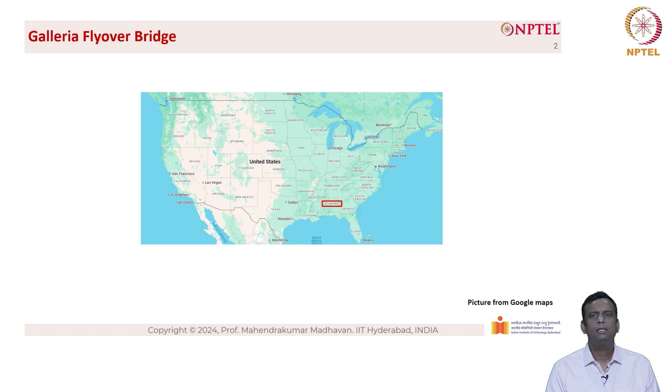This is the Galleria Flyover Bridge project, and what you see is basically the map of the United States, and on the rightmost side in the south there is a state called Alabama. Galleria is a place very close to the city of Hoover and Birmingham, and we are basically going to talk about a flyover bridge that connects the Galleria Mall with the Hoover city. You can see the highway I-459.

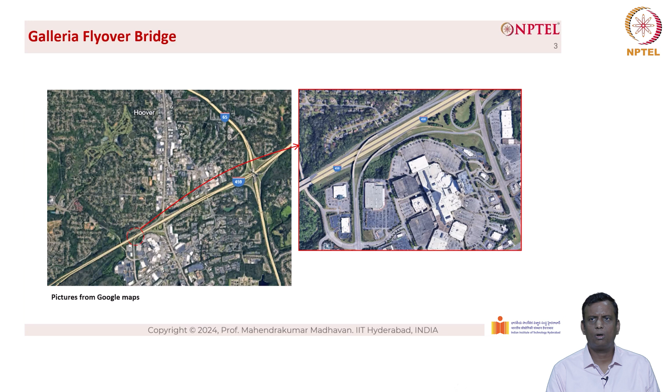A closer look at I-459 shows a bridge connecting the Galleria Mall from I-459. What you see on the right hand side is basically a huge mall. I've been to that mall, it's a very nice mall to spend time there. The project is called I-459 Galleria Flyover, Hoover, Alabama. Hoover is basically the city's name, a suburb of the greater city of Birmingham.

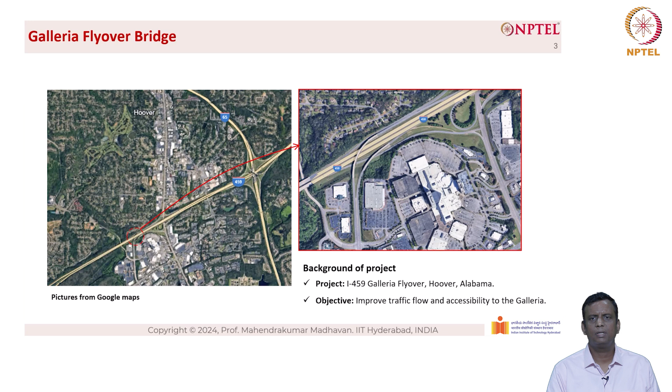The first one is the design and planning. The flyover structure is an elevated bridge with horizontally curved I-girders. When I say horizontally curved girders, don't get confused with its cousin, the arches. The arches are vertically curved. Here we are talking about a bridge. When you look at the plan from the top, it is horizontally curved, and hence it's called horizontally curved I-girders.

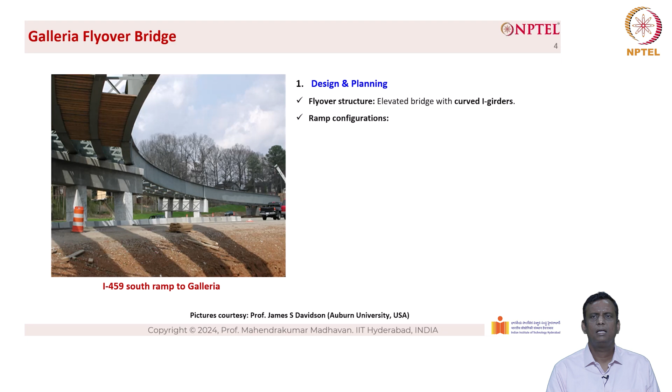The ramp configurations are: it's a two-lane exit from I-459 south to the Galleria Mall and a two-lane entrance from the Galleria to I-459 north.

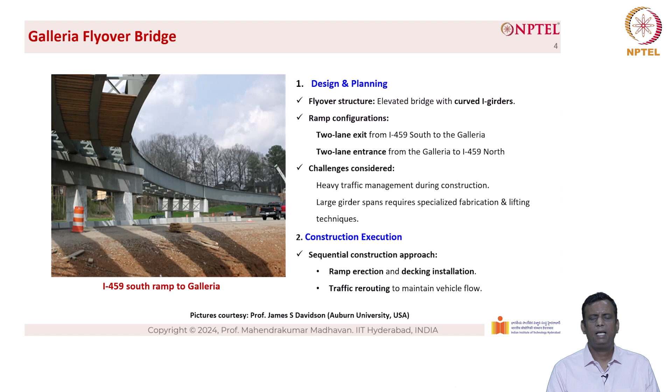The challenges considered are heavy traffic management during construction, and large girder spans requiring specialized fabrication and lifting techniques, especially for horizontally curved girders. For construction execution, a sequential construction approach was followed, first by ramp erection and followed by decking installation. The next important thing is traffic rerouting to maintain vehicle flow.

So the challenges in fabrication and construction: there are several fabrication techniques available for horizontally curved girders, especially for the flanges. The special methods are cut curving, heat curving, and cold bending, which introduce stresses.

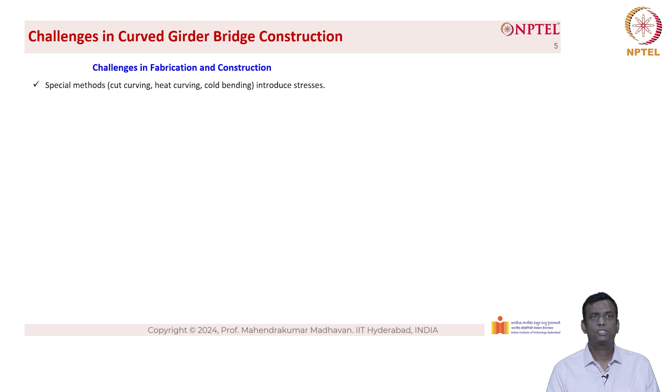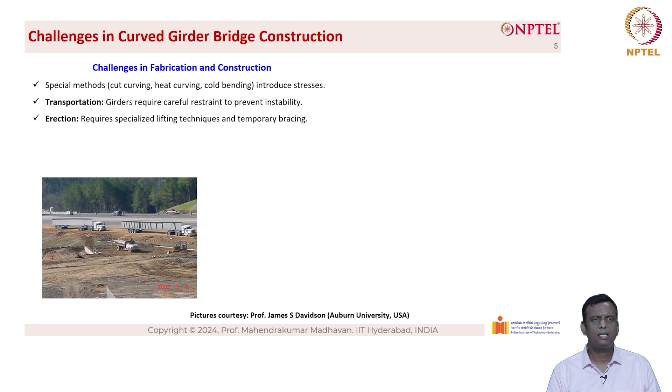The erection requires specialized lifting techniques and temporary bracing, and you can see the next picture that shows how the girders are being lifted through cranes.

Deck hardening, when you pour concrete, additional support is required to prevent distortion because, as you know, concrete is a liability during the deck pour and becomes an asset only after 28 days or once it has been completely cured. So we need to prevent any distortion that could take place due to the heavy dead weight of the wet concrete during construction. This requires additional support.

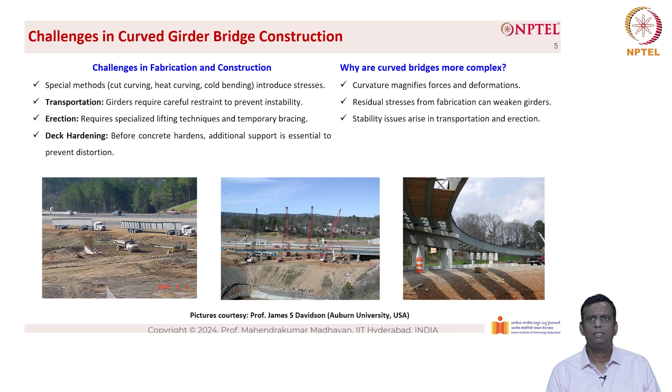The first and fundamental question we should understand is why curved bridges are more complex. Curvature basically magnifies forces and deformation, so it introduces torsion in addition to bending. The picture shows the horizontally curved nature of the bridges. Also, residual stresses from fabrication can weaken girders. Stability issues arise in transportation and erection, more so for curved girders than for straight girders.

The first fabrication method is the cut curving method. Here the flanges are flame cut from steel plates to the required curvature. The pros are it achieves any radius of curvature. The cons are that it is labor intensive and material waste due to scrap is very high when you do the cut curving process. Basically, the portions away from the curvature are ignored.

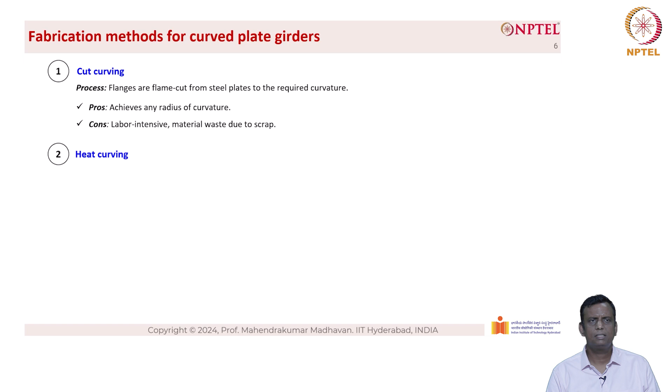The next one is the heat curving method. Here you basically fabricate an I-section which is a straight I-girder, and then you heat and cool the steel flanges at several locations using controlled bending. The methods are continuous heating, strip heating, or V-type heating. The pros are it is most economical with little material waste. The cons are it requires precise temperature control and specialized equipment. Basically, it is an art in heat curving, and the most common type of producing a horizontally curved girder is by V-type heating.

Several state Departments of Transportation in the US have expertise in V-type heating. They put the I-sections in a flat portion where the flanges are vertical and the webs are horizontal, supported at several locations since it's a large girder. In between the supports, V-type heating is applied, heating at several strategic locations to achieve the desired curvature. Once achieved, heating is stopped.

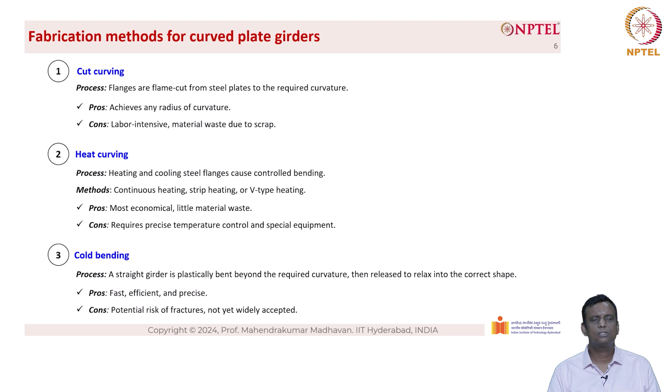The third method is cold bending. Here, a straight girder is plastically bent beyond the required curvature and then released to relax into the correct shape, known as the rebound effect or elastic relaxation. The pros are that it is fast, efficient and precise. The cons are the potential risk of fractures, and it is not yet widely accepted, because when bending the girder without heat, there is a possibility it could crack, which is undesirable.

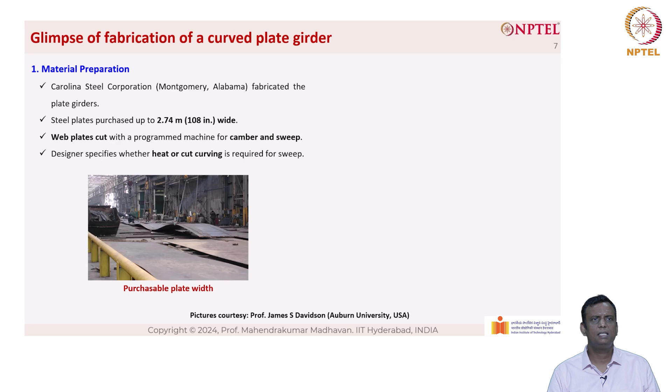Let's look at a glimpse of the fabrication of a curved plate girder. The first stage is material preparation. In this case study, the fabricator is located in Montgomery, Alabama, the capital of the state, and the organization is Carolina Steel Corporation, who fabricated the plate girders. The steel plates purchased were 2.74 meters, or 108 inches wide, and the web plates were cut with a programmed machine for camber and sweep. Camber means bending in the major axis, and sweep means bending in the minor axis. The designer specifies whether heat curving or cut curving is required for the sweep.

The web lies flat and the flanges are positioned vertically for tack welding. A specialist machine aligns and applies pressure to hold the flanges in place. The flanges are first tack welded and then the girder is flipped for full welding, which is submerged arc welding, typically used in India as well, in pre-engineered building factories these days.

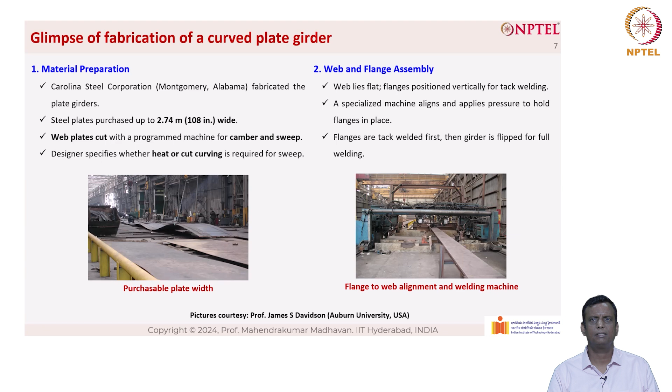A continuous fillet weld joins the flanges to the web, and flipping the girder ensures complete weld penetration. The weld sequence is carried out to control and minimize distortion, so welding isn't done continuously. Instead, strip welding is used, where certain portions are welded and gaps are left before welding other portions. This reduces the heat input, which in turn minimizes distortion. What you see on the rightmost side is the submerged arc welding.

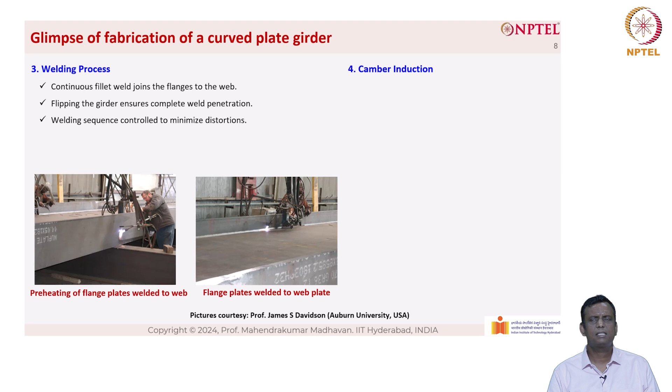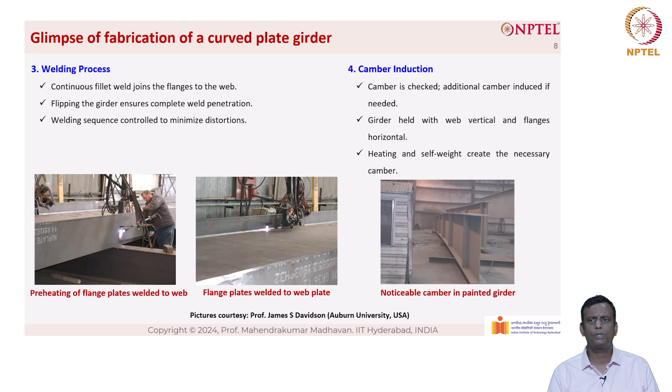Stage 4 is camber induction. Camber is checked and additional camber is induced if needed. The girder is held with the web vertical and flanges horizontal. Heating combined with self-weight creates the necessary camber, as you can see from the noticeable camber in the painted girder shown on the right.

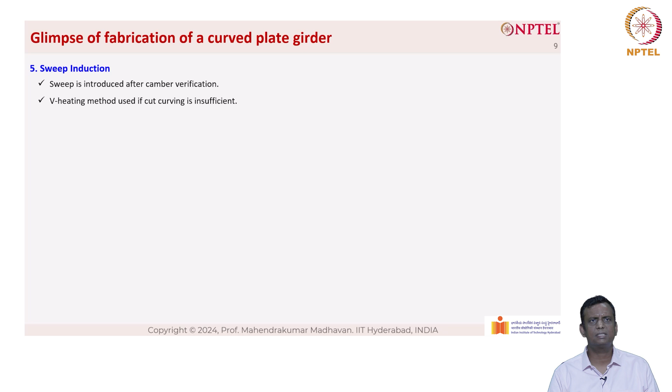The next step is sweep induction, which is bending in the minor axis. Sweep is introduced after camber verification. The V-heating method is used if cut curving is insufficient. So even if the fabrication method is cut curving, V-heating may still be used to introduce sweep. In this method, heat is applied in a V-shaped pattern along the flange of the girder, with the apex of the V pointing towards the desired direction of movement.

As described previously, heat is provided at the flanges, and the apex of the V points toward the desired direction of movement. If you want it to sag, you apply heat at the location closer to the ground. This causes plastic deformation beyond yield, and due to self-weight and loss in material capacity, it tends to sag, which can be treated as curvature. The self-weight combined with controlled torching heat creates the required sweep.

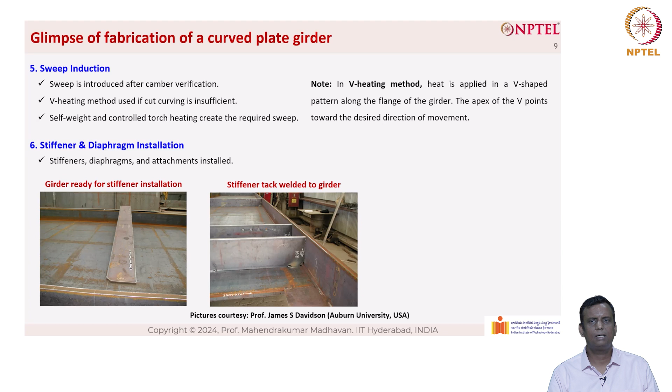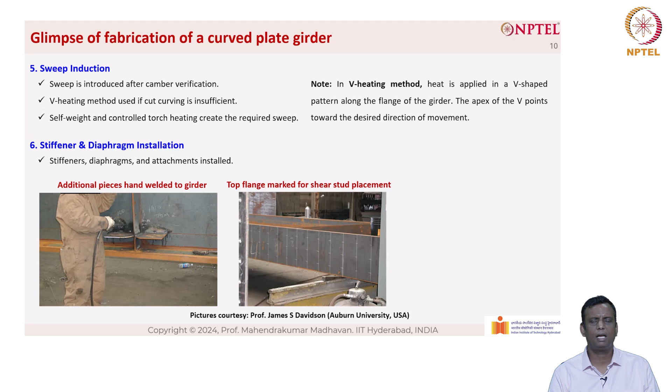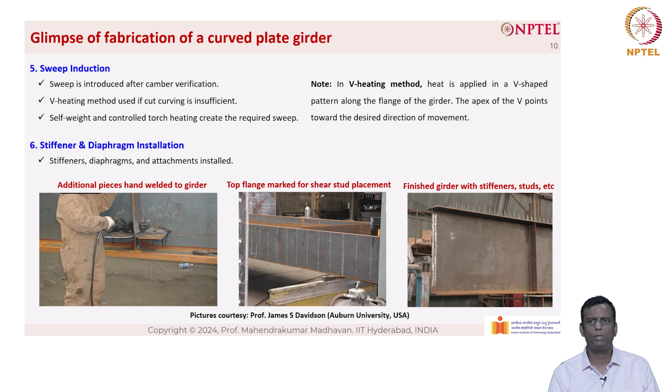Once that is done, you can see the finished girder with the stiffeners and studs, etc. The studs are required basically for composite action, so it will prevent slip between the concrete and the steel plate, ensuring more composite action. The more the composite action, the more your ability to carry load.

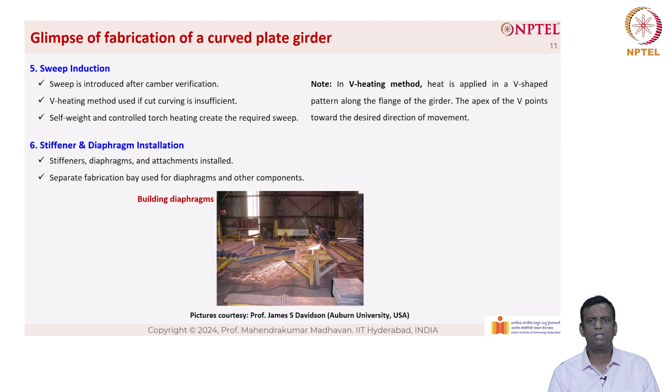Then after that, there is a separate fabrication bay used for diaphragms and other components. This picture shows the building of the diaphragms. Diaphragms also basically mean cross frames.

The next is surface preparation and painting. The plate girders are blast cleaned before painting, because if you don't clean it properly before painting, the paint will not stick with it and it will come out very quickly.

The cleaning can be done using a blast cleaning machine or manual blasting hose, typically using steel balls. The steel balls are kept inside a machine and hit at the plate girders, and all the dirt belonging to that will come outside, and it is clean.

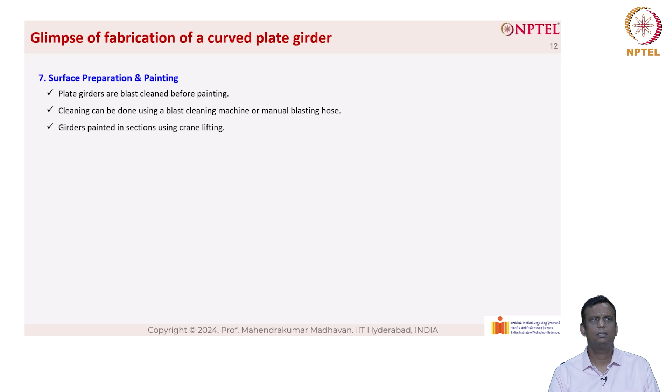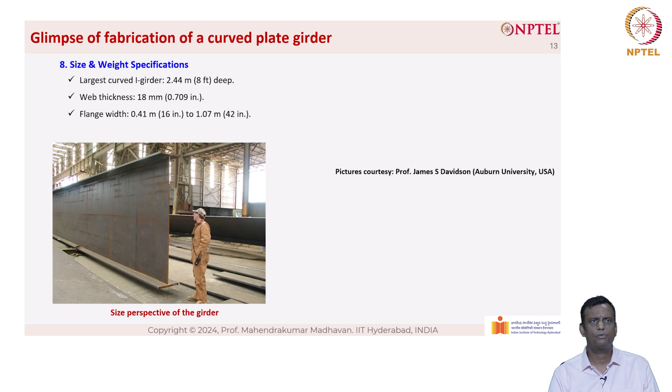The web thickness is typically 18 mm. The flange width varies from 16 inches to 42 inches, or basically 410 mm to 1070 mm, depending on the analysis part where you need more bending moment and shear force. The flange thickness is basically 1 inch to 3.75 inches, where 1 inch is 25 mm, so that's 25 mm to 95 mm.

The longest girder between the splices in this project is 106 feet, and the maximum weight of the girder is 68.3 metric tons.

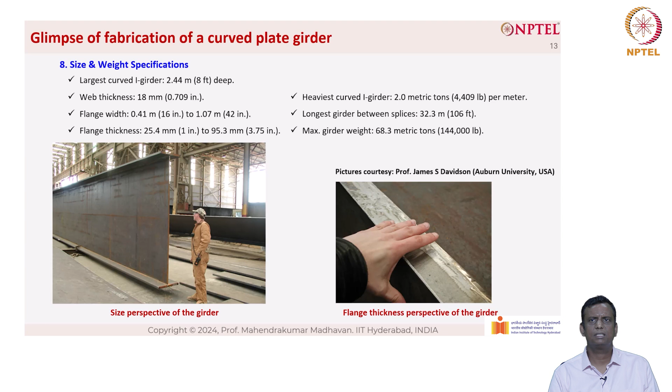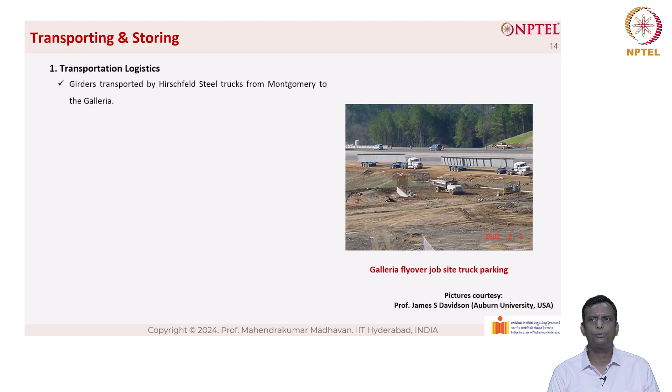Next comes transportation and storing, starting with transportation logistics. You can see that trucks are lined up and parked near the construction site in the picture on the right hand side. The girders are transported by Hirschfeld steel trucks from Montgomery to the Galleria, and coordination between the erector and the fabricator ensured timely delivery, because there needs to be good coordination between the erector and the fabricator.

The driving list is created based on the erection sequence, so you need to know which girders are going to be erected first, second, third, and so on. It becomes very essential to sequence the position of the girders, and accordingly the transportation should be carried out, so that the girders required immediately will be transported to the construction site.

The trucking methods are of two types. One is for a short girder, which is transported on a flat trailer, so when it is very short, a flat trailer is used. The next one is called a dolly, where long girders are transported using a dolly for better maneuverability.

If the girder is very long, there should be some ease of movement with the truck, both at the front and back portions where the girders are being transported. A dolly is a special mechanism where the truck and the backside of the truck need not be in one line, so the truck can move and the flat portion behind it moves differently to ensure maneuverability. The dolly has its own steering mechanism for navigating tight turns, because the length of the girder is very high. Without a dolly, it would be very difficult to transport, especially at locations where you have to take a tight turn.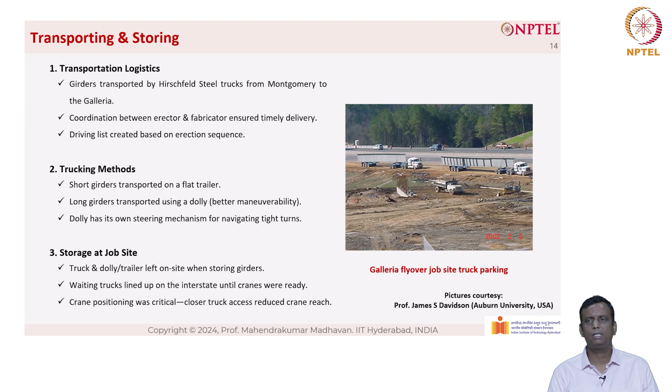Crane positioning was critical, because closer truck access reduced crane reach. The crane should be positioned so it can easily lift and place the girders without much effort. We also have to take into consideration the weight and size.

In this case, the weight ranges from 6.35 metric tons to 65.3 metric tons, and truck weight limits require special permits for oversized loads.

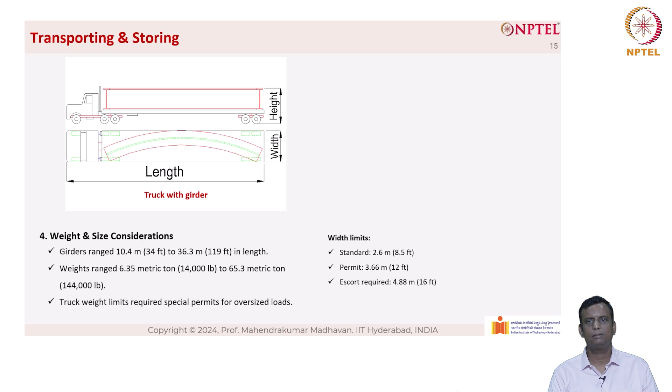When the width is standard, 2.6 meters, no permit is needed. When the truck width exceeds 8.5 feet and approaches 12 feet, a permit is needed. When it is closer to 16 feet, a permit with an escort is needed. An escort is a vehicle that goes up front, alerting people that a bigger vehicle is coming behind it. The next consideration is the height limit, which is 4.11 meters here, and it varies by state and bridge clearance.

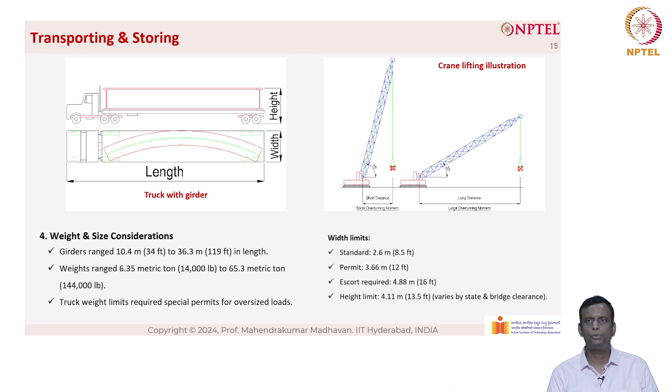The picture on top shows the crane lifting illustration. If it's a shorter distance, as described previously, there's not much difficulty, so it has a smaller overturning moment. But with a longer distance, there is a larger overturning moment, and you need to be careful. The crane location has to be judiciously selected so that the large overturning moment can be reduced.

Next is erecting. The erection team and planning is absolutely essential. Careful crane placement and the use of spreader beams with two pickup points are carried out. You can see the spreader beam, the brown colored steel girder. Then you have girder dogs, which are basically the clamps you can see. Next is the lifting and placing of the girders.

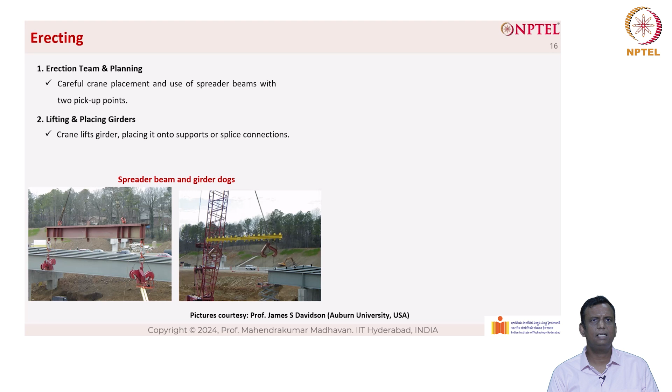The crane lifts the girder and places it onto supports or splice connections. Then the ironworkers align the girders and place the bolts using spud wrenches.

The third consideration is the pickup points, where to pick up the girders. ALDOT, the Alabama Department of Transportation, requires lifting points between the third and quarter points along the girder arc, because it is a curved girder. If it's a straight girder, the pickup points are taken from the quarter point. Because the curved girder introduces a twisting effect, the pickup point should be between one-third and one-quarter of the length of the girder. For long girders, such as 36.3 meters, there was long spacing between the pickup points.

Girder dogs and tag lines were used to prevent twisting and rolling. The girder dogs are the clamps used for picking up the girders, and the tag lines, along with the girder dogs, are used to prevent twisting and rolling.

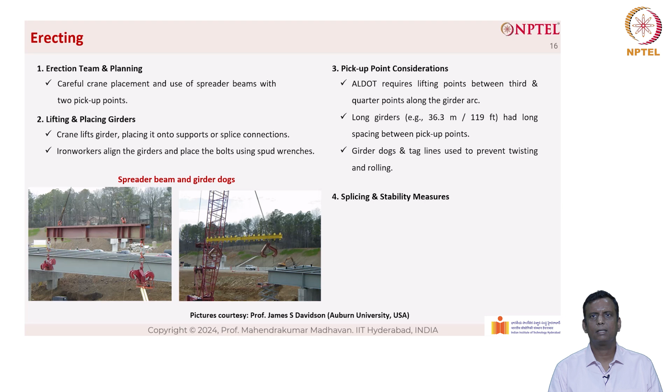The next topic is splicing and stability measures. Multiple girders are spliced together for long spans. The first girder is held by the crane until the next girder is aligned and bolted, done step by step. If you miss anything, disaster is waiting to happen, because sequencing the girders is very important. The girders are designed for composite action, but before the concrete is poured, you must make sure the girders are held by the crane until the next girder is aligned and bolted.

Up to 6 cranes are used at spans requiring 3 girder splices.

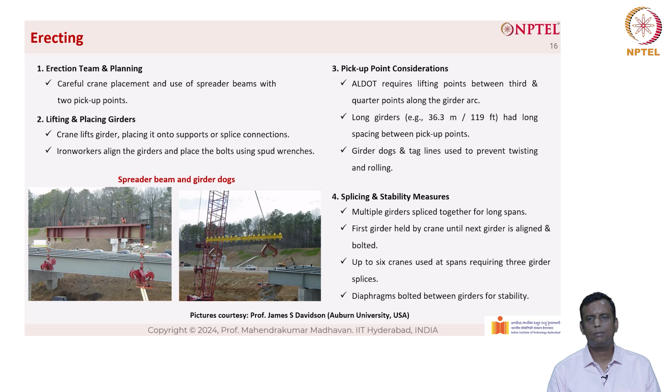Diaphragms are bolted between girders for stability purposes. Here the diaphragms mean cross frames, which basically connect the 2 girders. If you are picking up a single girder, there is a tendency for it to have instability. If you have 2 girders connected through cross frames, the instability reduces and the structure becomes more stable in configuration.

You can see the pictures here of how the girders are being lifted and put in place. You can also see the big red clamps, which are also known as the girder dogs.

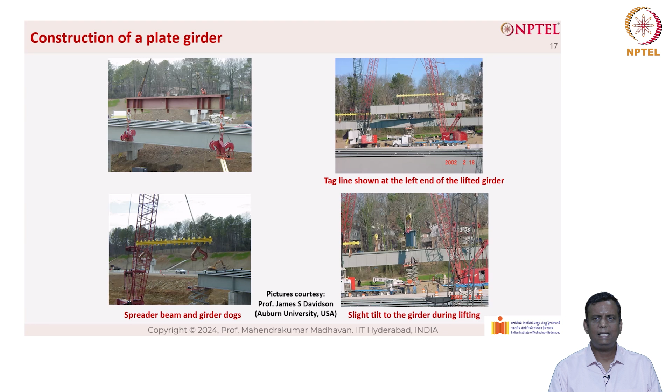You can also see, although not very highly visible, the tagline shown at the left end of the lifted girder. There is a slight tilt to the girder during lifting, which is obvious and expected, because if you don't have the proper clamps at that location, there could be a twisting effect.

Basically, what they do at the construction site is put the clamps with an assumption between 1/3 and 1/4 points. They lift it slightly and see whether it is stable or not, then they start iterating at the site, put the girder dogs, and then lift it.

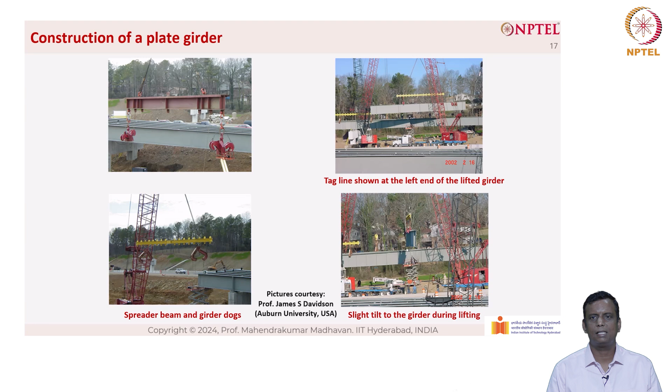You can see a closer look at the girder field splice at the Galleria flyover. This is basically the splicing that takes place between the web to web, and as you can see, a number of bolts are there.

You can also see that at this location there is a change in the cross section. Basically, the flanges are getting reduced. The width of the flanges is slowly getting reduced, and there is a transition, a tapering that takes place at the splice location.

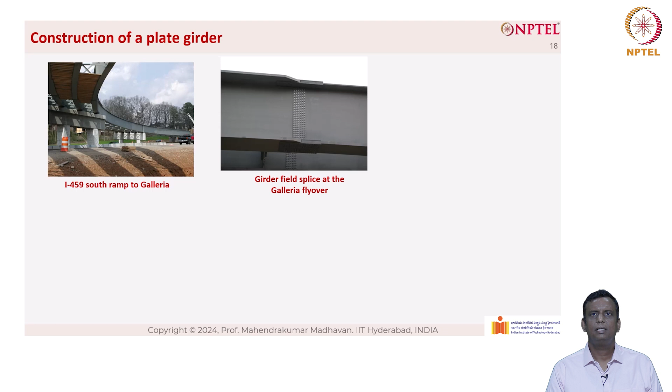This is also the place where the splices are put, because there is a reduction in the bending moment at that location, and hence the cross section is reduced on the right hand side of the picture. This results in lots of cost savings because there is a reduction in the moment capacity at those locations.

What you can see here is also the flange splice. If you look at a closer look at this one, you can see the flange splice at the bottom of the flange plate. This is also connected by putting a plate at the top as well as at the bottom, and it is connected by a number of bolts at this location.

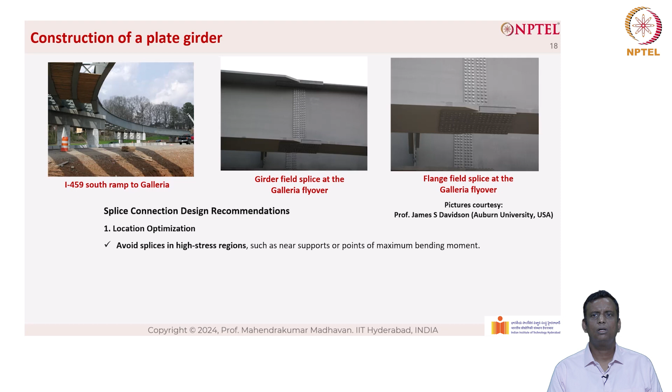Now let's look at the splice connection and design recommendations. First, location optimization is important. An important thing is to avoid splices in high stress regions as well as at supports or points of maximum bending moment. Prefer locations where the bending moment and shear forces are relatively low.

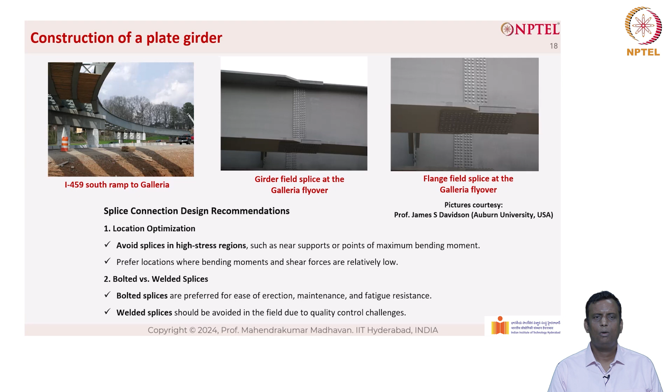The next thing we need to understand is bolted versus welded splices. Bolted splices are preferred for ease of erection, maintenance and fatigue resistance, because there is a small gap in the bolted connection since the bolt hole is bigger than the bolt, which helps increase fatigue resistance. Welded splices should be avoided in the field due to quality control challenges, because the quality of the weld at the site is typically questionable, whereas bolted splices are very good and most preferred during construction.

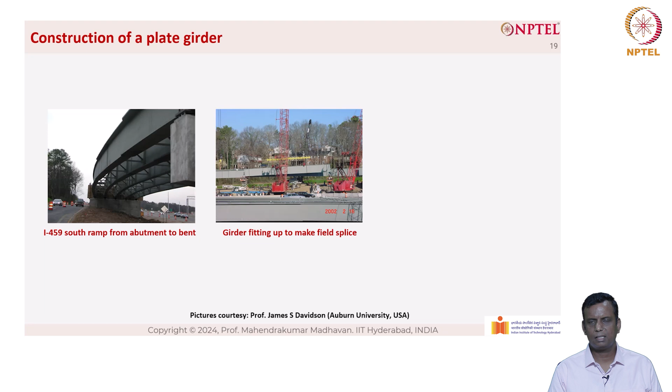This is the I-459 south ramp from abutment to bent, and you can see the girders fitting up to make the field splice. The girders are supported by each crane until the diaphragm and splice bolts are tightened, as you can see in the picture on the rightmost side.

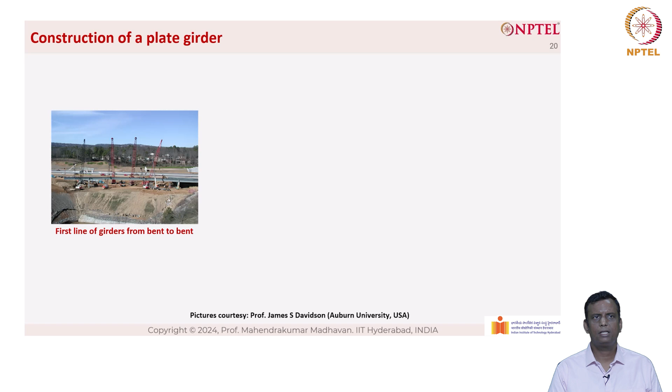With this, we come to the end of this small sharing of my thoughts on how girders, basically bridge girders, are designed and erected in practice. These are things that as a student it is very important for you to understand: what you do in a design class calculation in a classroom setting is very minimal, and what you do at the site is very interesting to know, how the design is translated into an actual product being constructed at the site. This understanding is very important.

This understanding will help you design a better structure, a safer structure, and a more economical structure. Thank you so much.